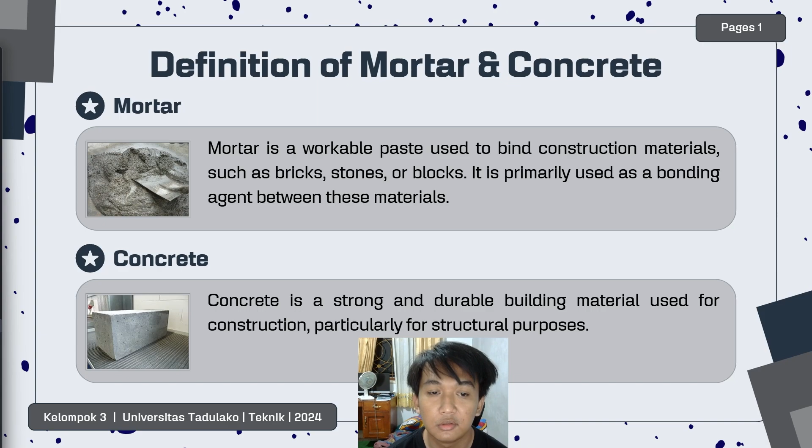So I'm gonna explain about the definition of mortar and concrete. For the first is mortar. Mortar is a workable paste used to bind construction materials such as bricks, stones, or blocks. It is primarily used as a bonding agent between these materials. For the second one is concrete. Concrete is a strong and durable building material used for construction, particularly for structural purposes.

For the next is the function of mortar. Binding materials. Mortar holds together masonry units such as bricks, stone, or blocks. It helps in creating a solid, unified structure by filling the gaps between the units. Mortar acts as a cushion between masonry units, distributing the load evenly and preventing direct contact between rigid materials like bricks or stones. This helps to avoid cracks due to differential stresses.

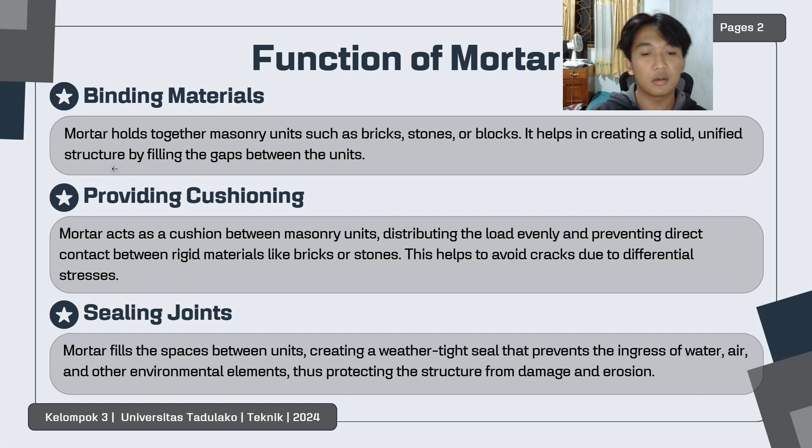For the third is sealing joints. Mortar fills the spaces between units, creating a weather-tight seal that prevents the ingress of water, air, and other environmental elements, thus protecting.

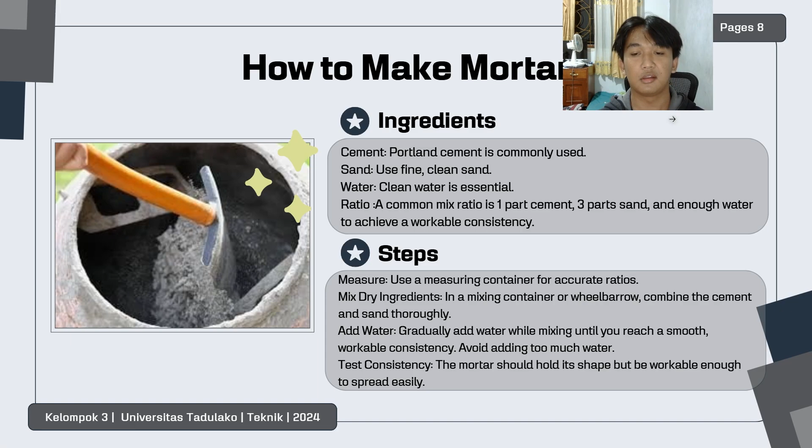Steps. For the first is measure. Use a measuring container for accurate ratios. Mix dry ingredients in a mixing container or wheelbarrow. Combine the cement and sand thoroughly. Add water. Gradually add water while mixing until you reach a smooth, workable consistency. Avoid adding too much water. Test consistency. The mortar should hold its shape but be workable enough.

That's about mortar. Next, I'm gonna explain to you about concrete. Types of concrete and their uses. Normal strength concrete, or NSC. Composition: made with standard ingredients, cement, water, and aggregates. Properties: average compressive strength around 20 to 50 MPa, megapascal. Uses: suitable for pavements, residential buildings, and non-structural components.

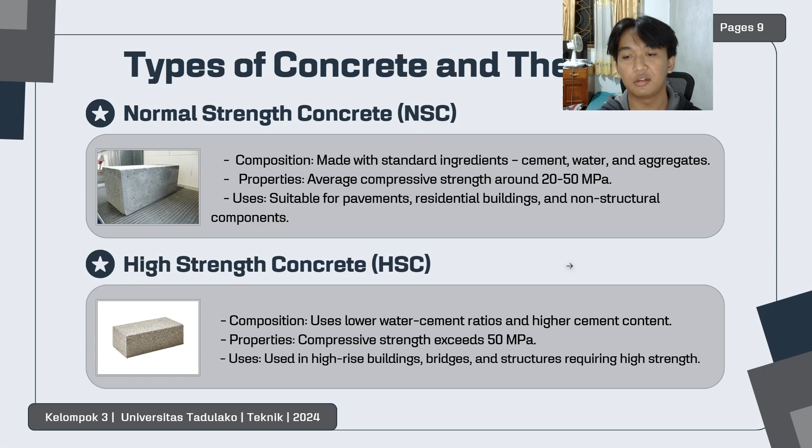For the next is high strength concrete, HSC. Composition: uses low water-cement ratios and higher cement content. Properties: compressive strength exceeds 50 MPa. Uses: used in high rise buildings, bridges, and structures requiring high strength. And next is high performance concrete, HPC. Composition: contains chemical and mineral admixtures to enhance performance. Properties: improved durability, workability, and strength. Uses: used in complex and challenging construction environments such as long span bridges and offshore structures.

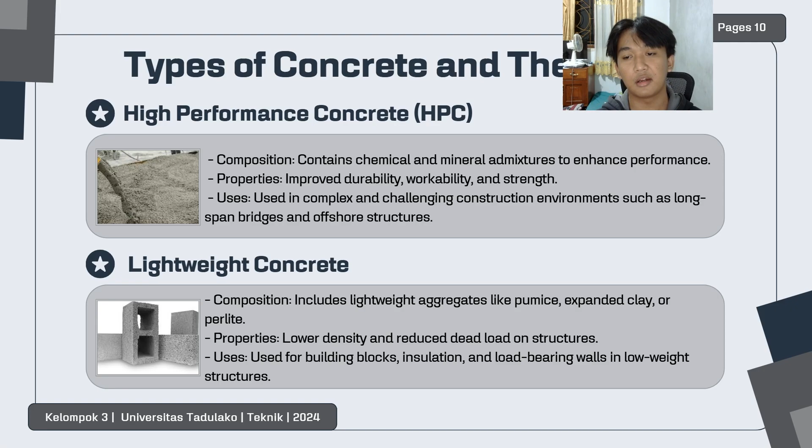For the next is lightweight concrete. Composition: includes lightweight aggregates like pumice, expanded clay, or perlite. Properties: lower density and reduced dead load on structures. Uses: used for building blocks, insulation, and load-bearing walls in low-weight structures. For the next is reinforced concrete, RC. Composition: concrete combined with steel reinforcements. Properties: enhanced tensile strength due to steel reinforcements. Uses: common in beams, slabs, columns, and foundations for both buildings and infrastructure.

For the next is pre-stressed concrete. Composition: reinforced with high tension steel strands before concrete is cast. Properties: excellent in handling tensile stresses, minimizes cracking. Uses: used in long span bridges, precast girders, and heavy load bearing structures.

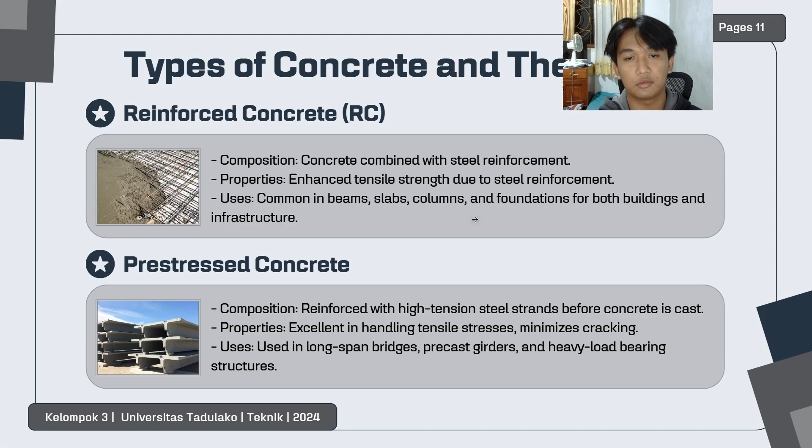Self-compacting concrete (SCC). Composition: high flowability without the need for mechanical vibration. Properties: fills formwork easily, reduces labor, and improves surface finish. Uses: suitable for structures with congested reinforcement and complex formwork.

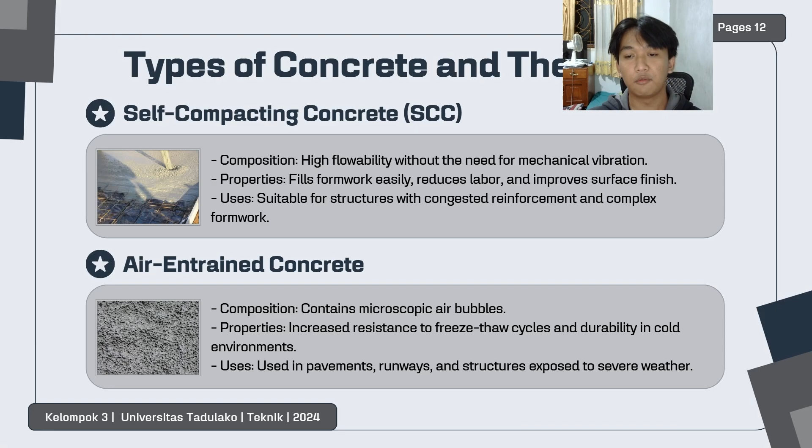Air-entrained concrete. Composition: contains microscopic air bubbles. Properties: increases resistance to freeze-thaw cycles and durability in cold environments. Uses: used in pavements, runways, and structures exposed to severe weather.

Fiber reinforced concrete, or FRC. Composition: concrete mixed with fibers, steel, glass, synthetic. Properties: improves toughness, crack resistance, and impact strength. Uses: used in industrial floors, pavements, and tunnel linings.

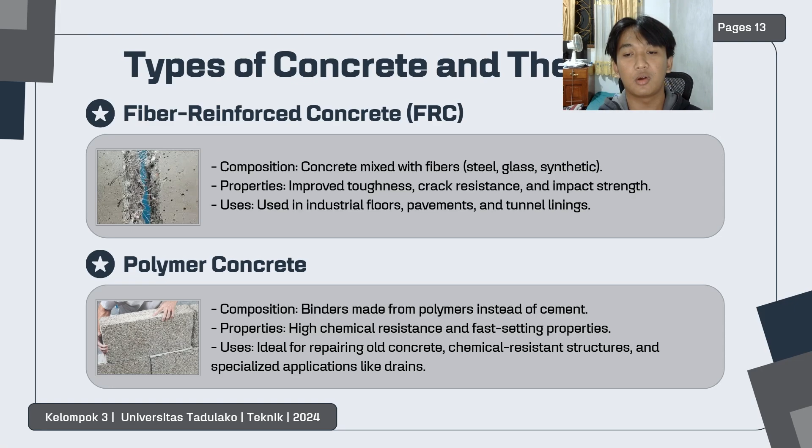Polymer concrete. Composition: binders made from polymers instead of cement. Properties: high chemical resistance and fast setting properties. Uses: ideal for repairing old concrete, chemical resistant structures, and specialized applications.

I'm going to show you all how to make concrete. Materials needed: cement, usually Portland cement, as the binding agent. Sand, fine aggregate that helps to fill voids between the coarse aggregate and provides smoothness. Gravel or crushed stone, coarse aggregate for strength.

Water, initiates the chemical reaction, hydration, to bind the materials. Optional additives, admixtures for improving specific properties like workability, durability, or strength. Next are the tools to make concrete: a mixing container, wheelbarrow, bucket or concrete mixer, shovel or hoe for hand mixing, measuring bucket, trowel for finishing.

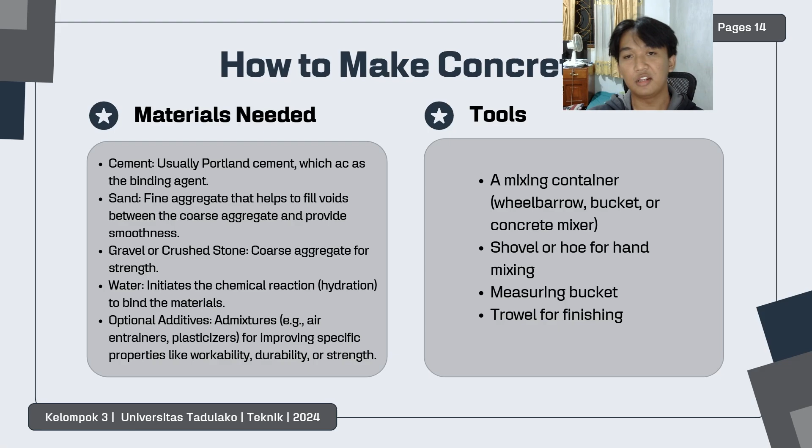Standard mix ratio. A common mix ratio for general purpose concrete is 1:2:4, which means 1 part cement, 2 parts sand, and 4 parts gravel or crushed stone. Water, enough to achieve the desired consistency, typically around 0.5 to 0.6 times the weight of the cement. The mix ratio can vary depending on the application. For example, foundation work 1:3:6, weaker concrete; driveways, patios 1:2:3, stronger concrete.

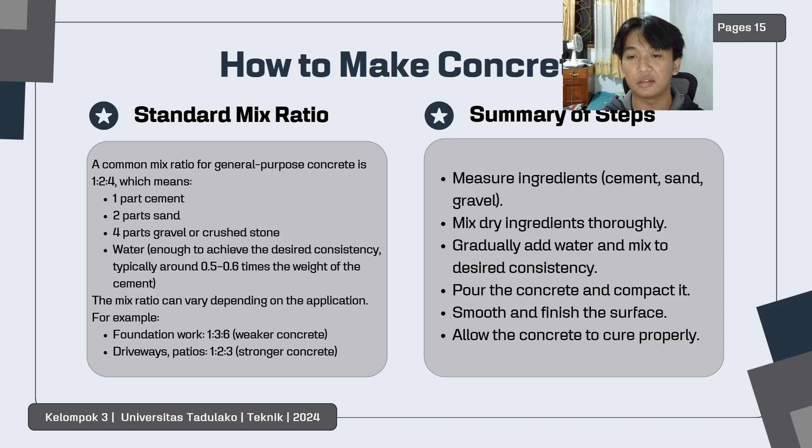Summary of steps. Measure ingredients: cement, sand, and gravel. Sorry. Mix dry ingredients thoroughly, gradually add water and mix to desired consistency. Pour the concrete and compact it. Smooth and finish the surface.

Characteristics of good concrete. Compressive strength. Definition: compressive strength refers to the ability of concrete to withstand loads without being crushed. It is measured in megapascals or pounds per square inch after curing for 28 days. Importance: high compressive strength is critical for supporting structural loads in buildings, bridges and other infrastructure. Good quality concrete typically has compressive strength ranging from 20 megapascals to 50 megapascals, depending on the specific application.

Durability. Definition: durability refers to concrete's ability to resist environmental factors such as weathering, chemical attacks, abrasion, and freeze-thaw cycles over time. Importance: a durable concrete structure can last longer, reducing the need for repairs and maintenance. This characteristic is especially crucial in environments with aggressive conditions.

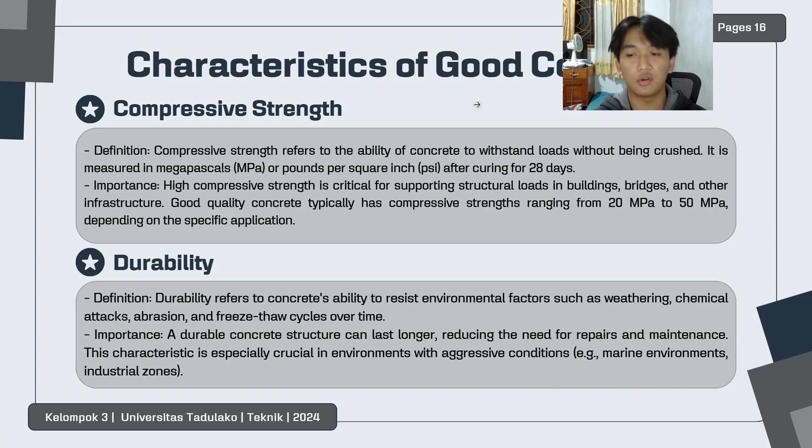Workability. Definition: workability is the ease with which concrete can be mixed, placed, compacted, and finished without segregating or bleeding. Importance: good workability ensures proper placement and compaction, which directly affects the strength and durability of the concrete. It can be controlled by adjusting the water-cement ratio, using admixtures, or selecting appropriate aggregates.

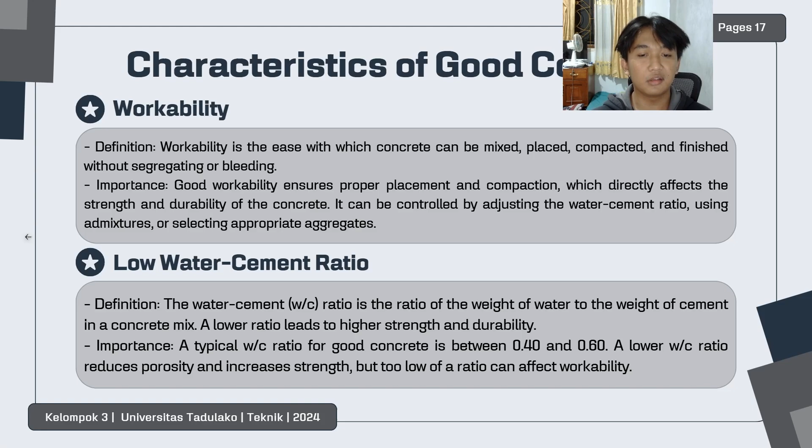Low water-cement ratio. Definition: the water-cement or w/c ratio is the ratio of the weight of water to the weight of cement in a concrete mix. A lower ratio leads to higher strength and durability. Importance: a typical water-cement ratio for good concrete is between 0.40 and 0.60. A lower water-cement ratio reduces porosity and increases strength, but too low of a ratio can affect workability.

Resistance to chemical attack. Definition: concrete should be able to resist chemical attacks from sulfates, acids, chlorides, and other aggressive substances that can cause deterioration. Importance: in environments exposed to aggressive chemicals, it is essential for concrete to maintain its integrity over time. This can be enhanced by using appropriate additives and cement types.

Proper curing. Definition: curing is the process of maintaining adequate moisture, temperature and time to allow the concrete to reach its maximum strength and durability. Importance: proper curing prevents the concrete from drying out too quickly, which can cause cracking and reduce strength. The standard curing time is 28 days, during which the concrete gains most of its final strength.

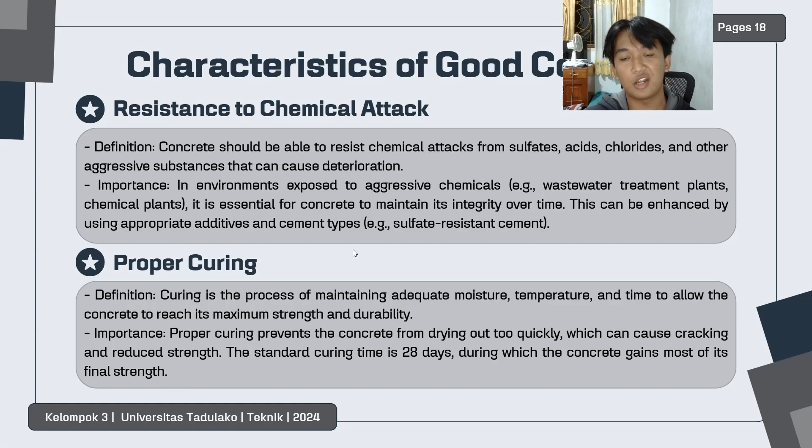Low permeability. Definition: permeability refers to the ability of concrete to allow fluids or gases to pass through its pores. Importance: low permeability is essential for protecting concrete against water penetration and chemical ingress, which can lead to corrosion of embedded steel reinforcement and degradation over time.

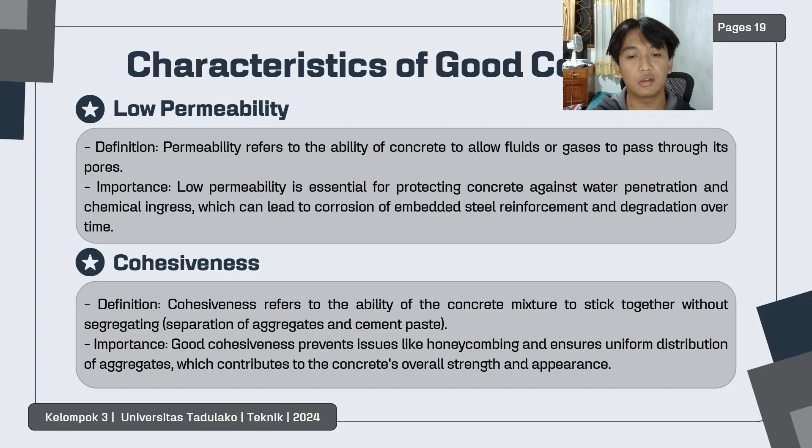Cohesiveness. Definition: cohesiveness refers to the ability of the concrete mixture to stick together without segregating. Importance: good cohesiveness prevents issues like honeycombing and ensures a uniform distribution of aggregates, which contributes to the concrete's overall strength and appearance.

Minimal shrinkage and creep. Definition: shrinkage is the reduction in volume as concrete dries and hardens, while creep refers to the gradual deformation of concrete under sustained load over time. Importance: minimizing shrinkage and creep is crucial for preventing cracks and deformation in concrete structures, especially in high-load applications like bridges or high-rise buildings.

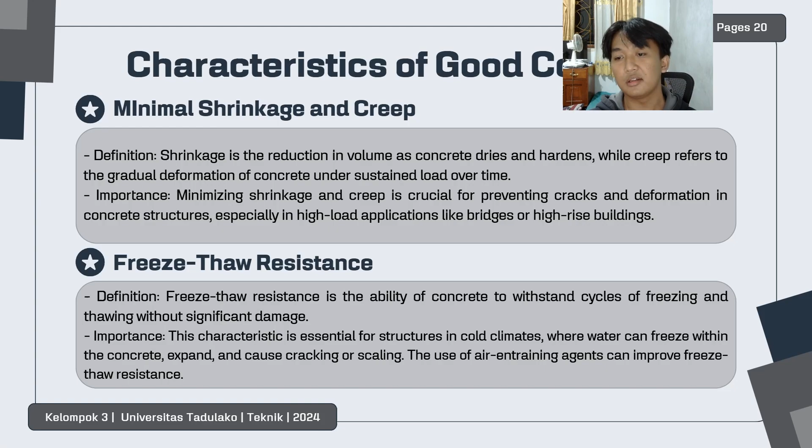Freeze-thaw resistance. Definition: freeze-thaw resistance is the ability of concrete to withstand cycles of freezing and thawing without significant damage. Importance: this characteristic is essential for structures in cold climates where water can freeze within the concrete, expand and cause cracking or scaling. The use of air-entraining agents can improve the freeze-thaw resistance.

That's all the material about mortar and concrete that we can provide.